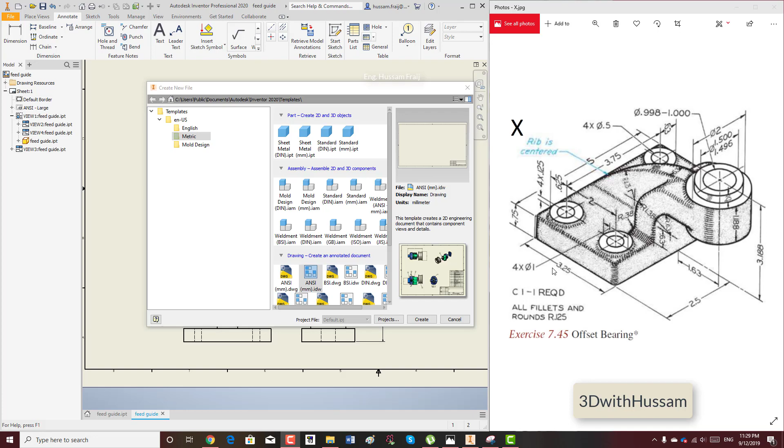Hello everyone, we'll start with offset bearing, letter X. This is in inch: 0.5, 0.9, 1.5, 0.75. English, standard, and create. Okay, this is also an easy part.

We'll start from the top view and we'll create from the center rectangle, 3.25 tab 5. Okay, so here is the rectangle. We'll click finish, we'll give it extrude 0.75. Okay, now we finish.

Okay, now let's go to the right side view. We'll start 2D sketch. We have here this cylinder at distance from the bottom until up 3.188. We can draw it in this view as revolve, but I want to draw it for you as extrude, so it's okay. You can just skip this, right click, delete the sketch.

Now you can do one thing, it's very easy. You can go to the bottom here, click on work plane, go on the bottom, touch and move up, and then type minus 3.188. Click here and click on the home. See, now you are at the top of this. So start the sketch on this work plane on the top. Now you are on the top.

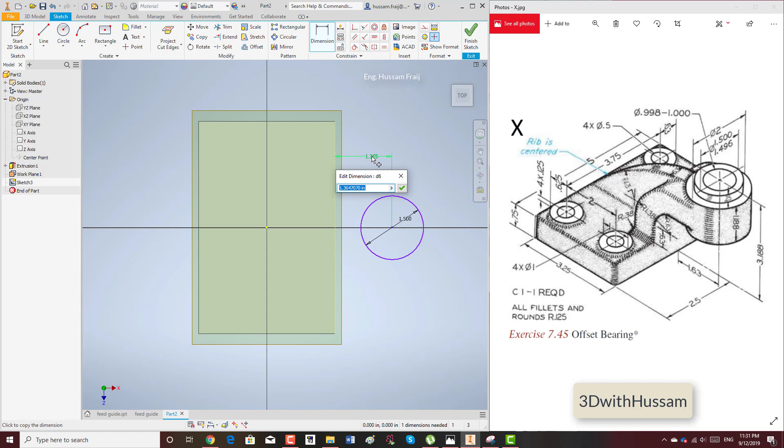So what you need to do is to create a small circle for this one, 1.5. It has tolerance, I will choose one of them, 1.5, and the distance from here to the edge is 1.63. So from the center to the edge 1.63. Then I will click finish. I'll extrude this circle down only 0.25 as mentioned here.

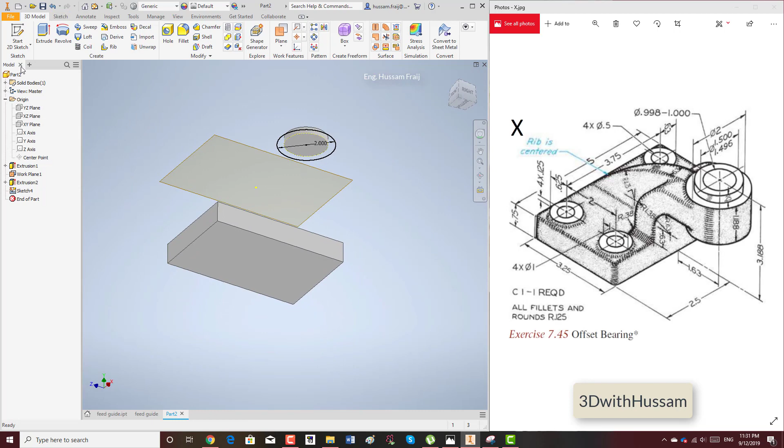And then from the bottom of the circle I will start a new 2D sketch here. I will draw like this. The diameter is 2, so 2, and I will click finish. I will extrude this value, I think 1.188. This is how I understand it. Okay, so now we have these two. I will leave this empty, later I will create a hole.

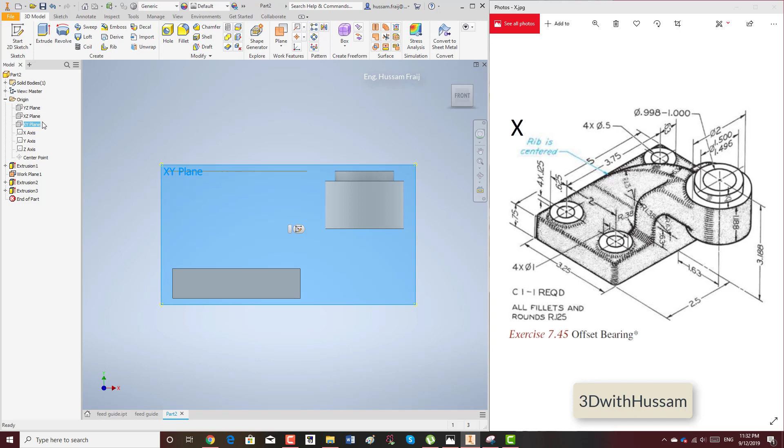Now we will create this rib, so we'll go to this right side view, start 2D sketch. We'll create first line like this, and we will create another line like this. For the first radius, what's the radius? 0.63. So fill it 0.63 from here to here. And the distance from the edge to the center of the radius is 0.63. From edge to the center, yes, 0.63, and this 1.63.

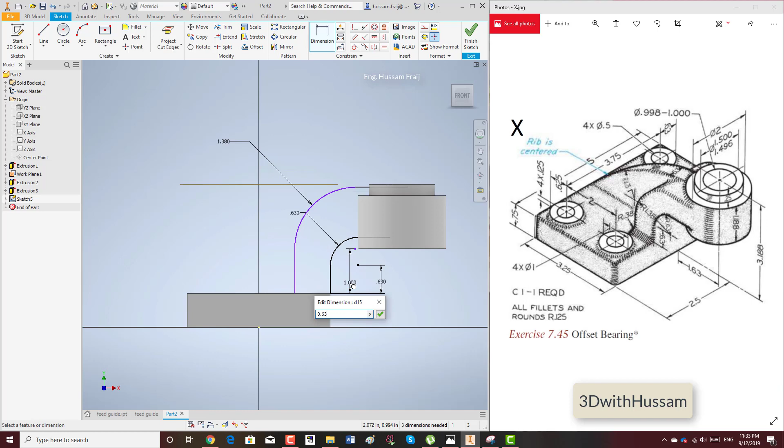And this one, this radius 1.38. Here, from here to here, this one, 1.38. And the center from here to the edge is also 0.63. So it's like this. See, because it has the same center, this and this have the same center.

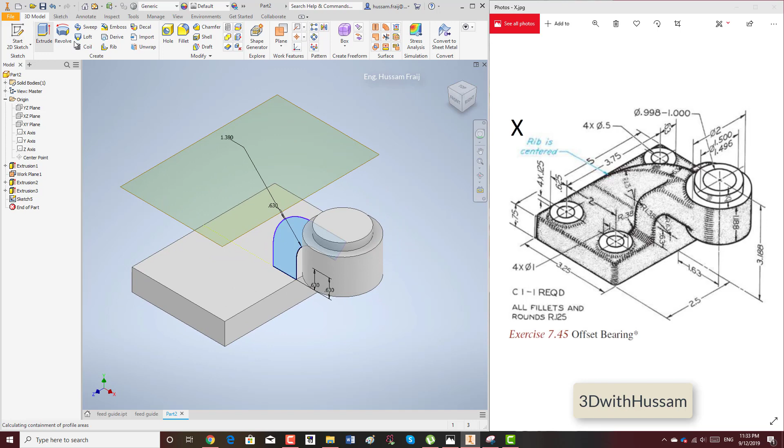Now we'll create line from here to here, it's okay, no problem, and we'll create line from here to here. We'll finish this, click on the home, click extrude middle symmetric, and we'll enter the value. What's the value for this one? It's the same here, 2, tangent with the circle. So 2, it is tangent with the circle like this.

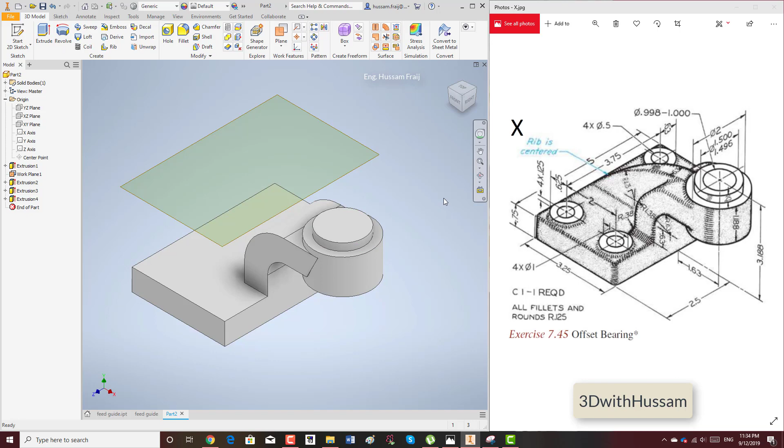See, we have a problem here. We'll go back to our sketch, right click, edit sketch, and we'll modify this line. We'll make it straight like this, and we try to make it until the center. So where is the center? Here. Try to make this line until the center, like this. Okay, this will be deleted. So this will be perfect.

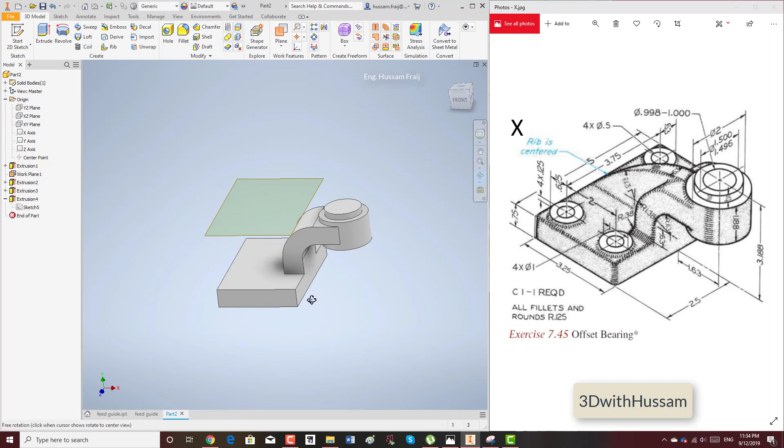Okay, this is perfect. This work plane, right click, invisible, remove. Now we draw this one. From the right side view, which is this work plane, start 2D sketch again, and then we will draw an arc from here until here, and the center of the arc.

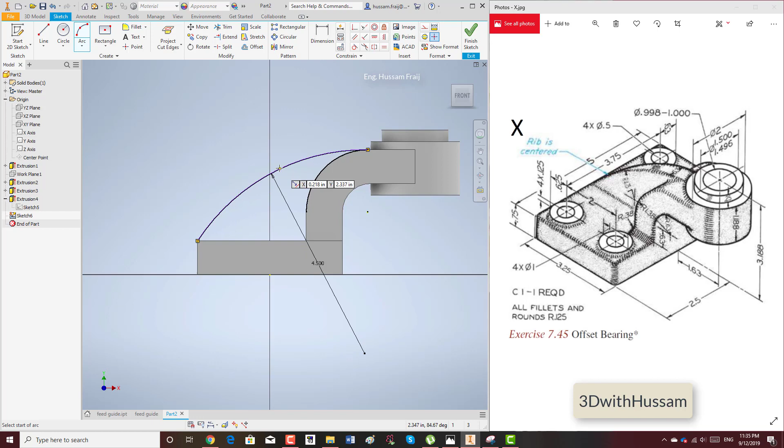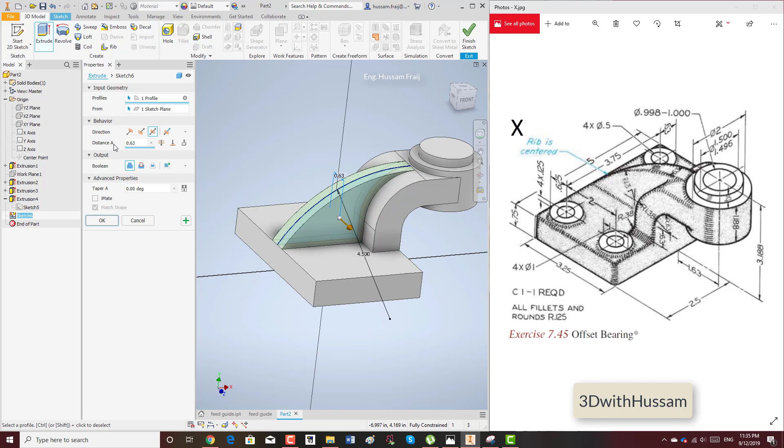4.5. Okay, now I will redraw the arc again here, from here to here, and I will draw a line here, and I will draw a line here. So I need to have this closed profile. Okay, then I will extrude middle, and this one has 0.63 like this.

Okay, so we finish this part. It is an easy part. I will go to the top view. I will create a rectangle from the center. Yes, rectangle like this, and this rectangle we make it as construction because we need only the center of the holes.

Okay, since this is a spot face, let's draw a point. So point. It's not a spot face. No, it's not a spot face. It's a normal hole that has...

...height. What's the height? 0.63. No, it's not the height. I cannot see the height. 1.25. Okay, 1.25. So I will draw circles.

So what's the circle diameter? 0.5, this is the internal. The external is this one, 1. Okay, 1.

And I can copy this one from the point here to here to here to here. Okay, and we did not define the center, so from here to here 5, from here to here, oh, it's not 5. The total is 5. 3.75.

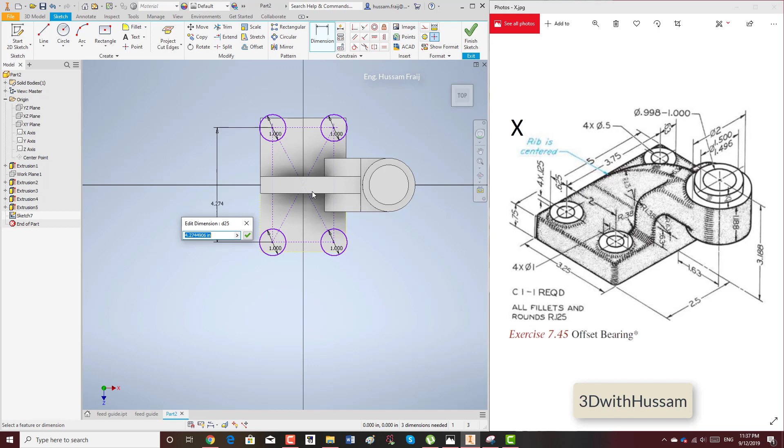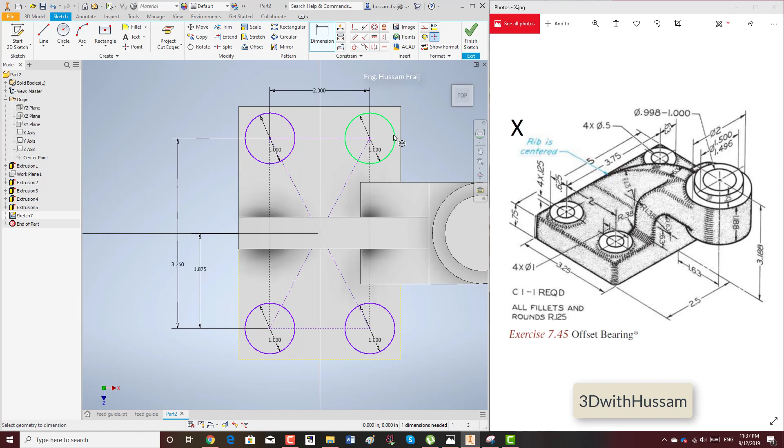Okay, and from here to the center, 3.75 over 2. Okay, this has to be the same. This point go here, this point go here. Okay, now for the width, this one how much? 2. Okay, 2. That's it, finish.

1.25. Extrude this one, this one, this one, and this one. 1.25. 0.125. 1.125.

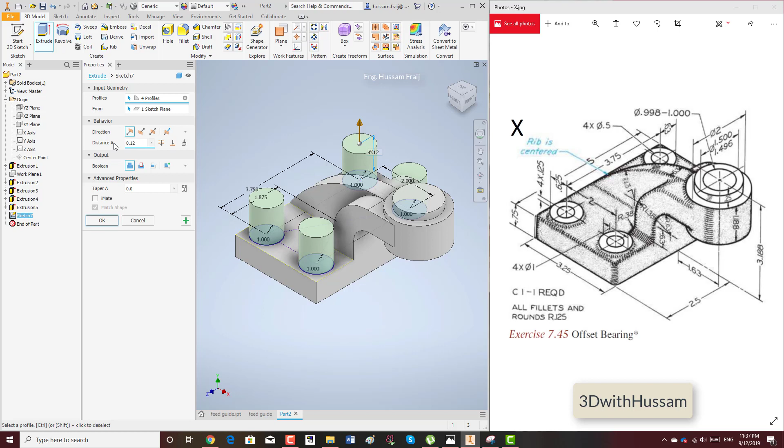Yes, and then start extrude here, and we'll draw another circle. So you can draw a circle here. What's the diameter? Diameter 0.5.

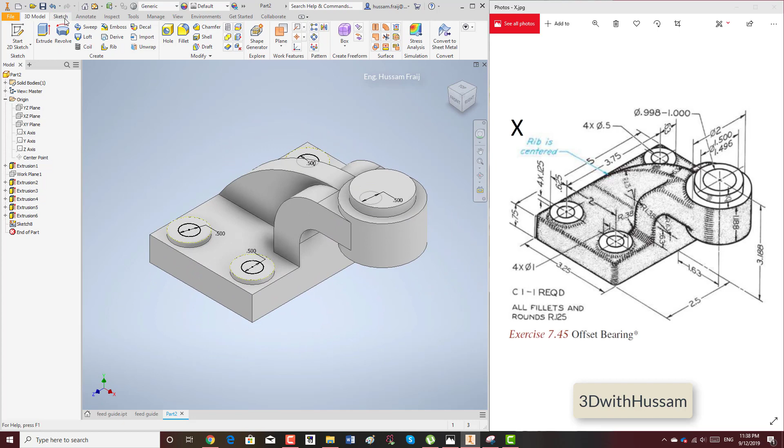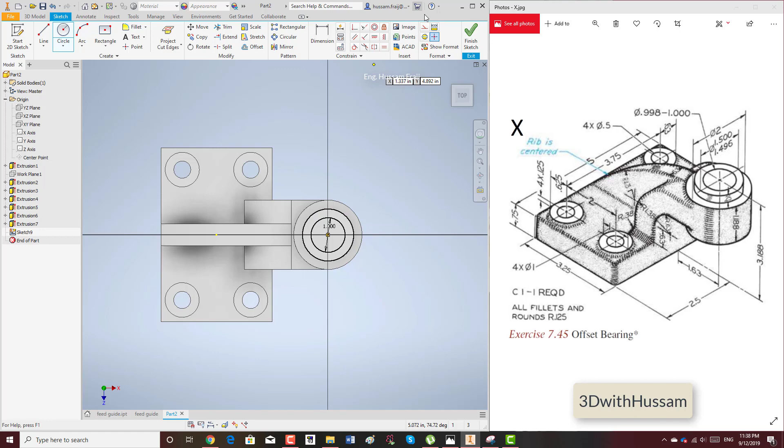Cut all. We finish. Now we'll go back to this part and we draw our circle. I usually leave this until the end. So this is how much? 1. Can you see here? From, okay, I will just choose 1. I'll create extrude, cut all.

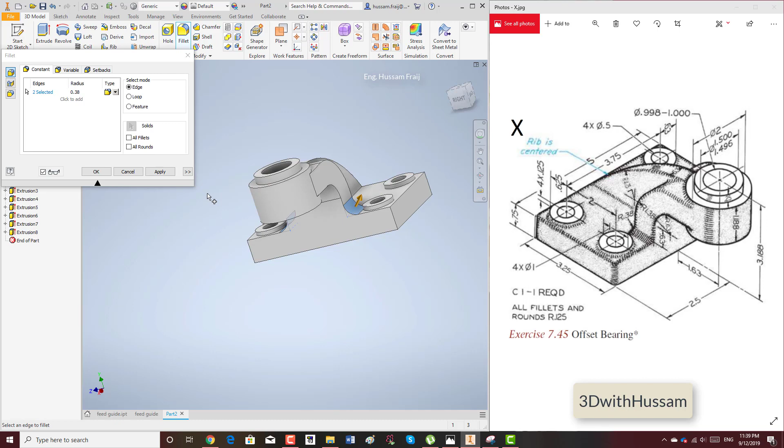That's it. They are asking here to add radius 0.38. I think this radius is important. This one, 0.38, and from the other side 0.38, apply. As I said, on my drawing, I don't prefer to add a fillet because fillet will make it misleading for your drawing. Okay, so I will keep this.

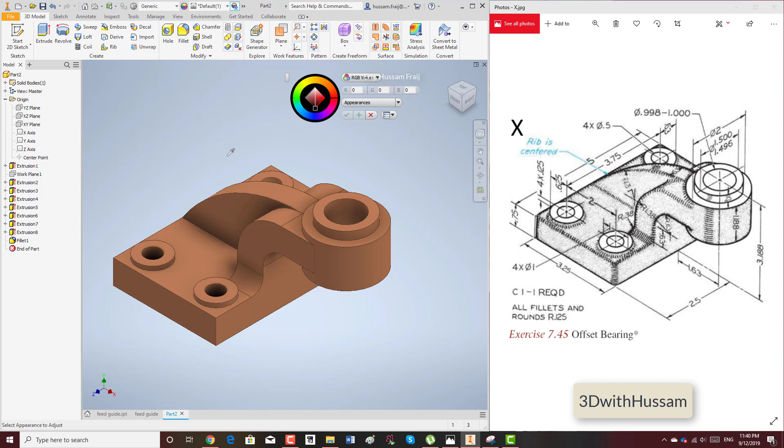Now let's try to add color. Not this one, this one. This part, let's try to make it like, let's try to find like orange, not orange, brown. Yeah, I think this is good brown. Okay, view.

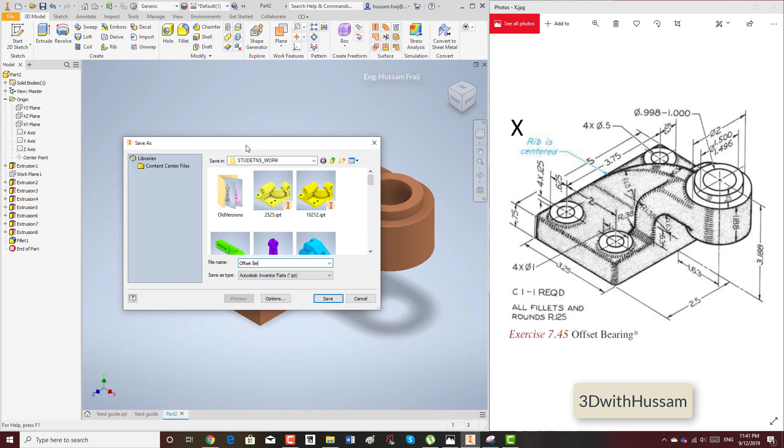So this is nice and good. Move it. Okay, save. Offset bearing. Copy.

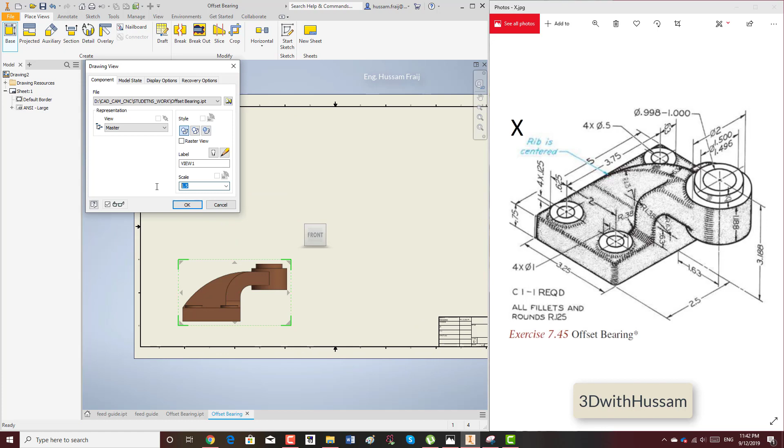File, new drawing. Base. Let's see, 1.5. Or let's keep it 1. I will make zoom on the part itself like this, so I don't want to adjust the dimensions now.

Okay, project it to this one, project it here. So here we have top and we have right side view, top and front. So this is dimension, this is dimension from here to here, from here to here, from here to here, from here to here, from center to edge.

The total height, the total height 3.19, 3. Yeah, if you click here and show here in the tolerances and add an extra digit, you will find it. Okay, dimension.

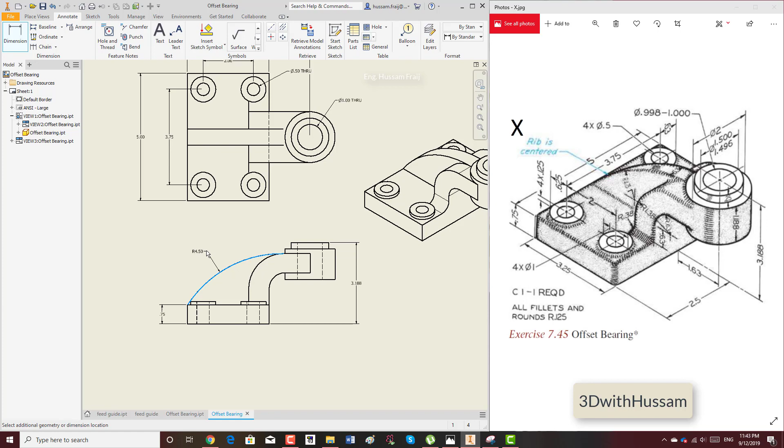This one from here to here, this radius is 4.5, this radius, the center from the radius to the bottom, this radius, and here we go. If I miss any of them, you can double click here and add before quantity.

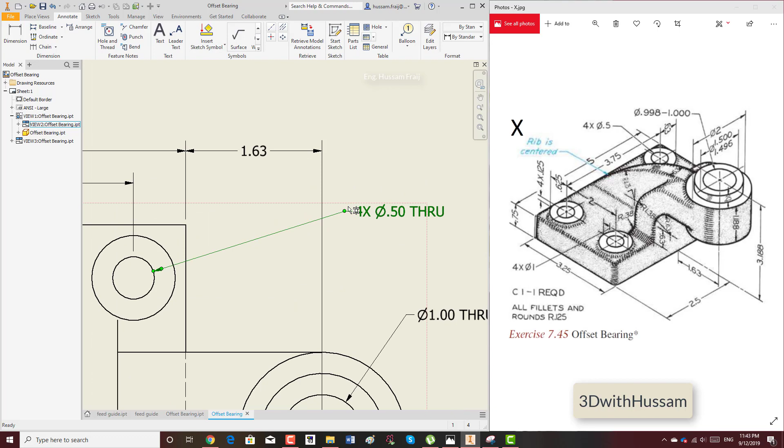Okay, so they will be 4. If I miss any dimensions, you can add them, or you can type for me in the comment. I will add it, or at least you know that I forgot. Okay, I hope you enjoy.